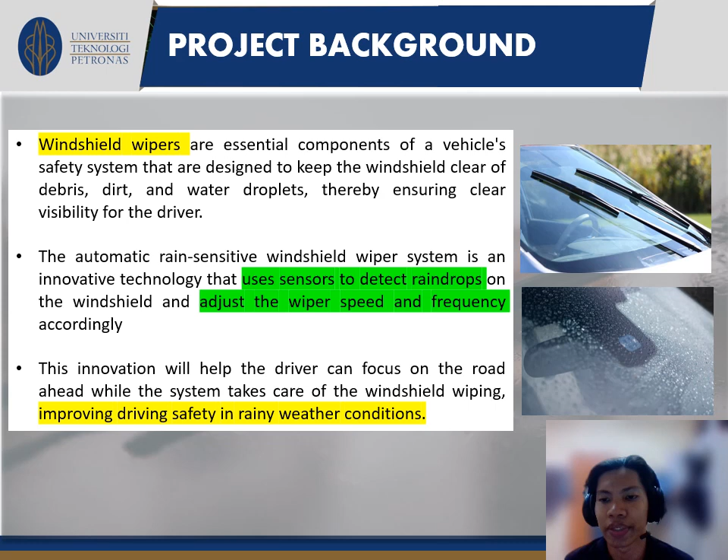Depending on the amount of the rain, the speed can be adjusted. So in this project, we are innovating the windshield wipers by using sensor to detect raindrops on the windshield, and it will automatically adjust the wiper speed and also the frequency. This automatic rain sensitive windshield wiper system then will help the driver to focus ahead on their driving, while the system will take care of the windshield wiping. Therefore, it can improve the driving safety in rainy weather condition.

Moving on to the problem statement for this project, as we may know, traditional windshield wipers are manually operated, where we can change its speed or frequency at the back of our steering. This method requires drivers' constant attention to adjust them. This then will distract the driver's attention away from the road, which is very dangerous, which then can lead to the increase in the risk of accidents.

A statistic by WHO or World Health Organization mentioned that more than 2 million people die in accidents each year during rainy season. These numbers are very concerning, so drivers nowadays really need to be aware of the safety of their car, especially in wet road conditions.

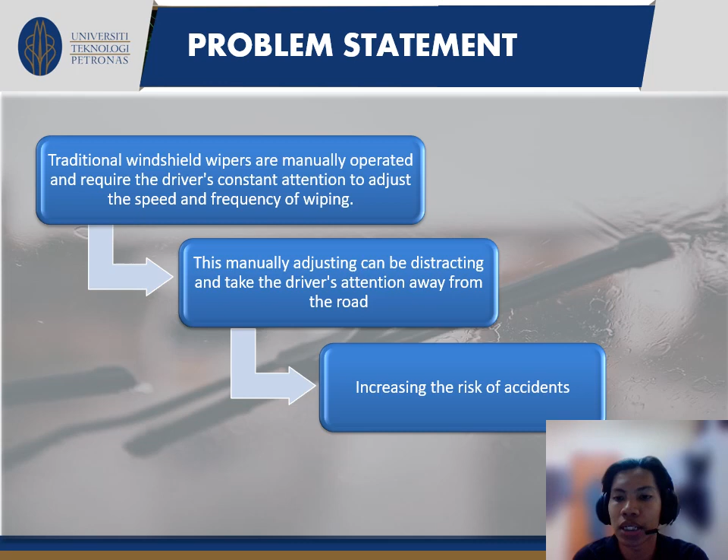To address the issue just now, we had come up with two main objectives for this project. Firstly, to develop a reliable and responsive automatic rain-sensitive windshield wiper system. So the system will significantly improve the driving safety, making it easier and more comfortable to drive in rainy weather conditions. Next, our objective is to design a user-friendly intelligent wiper control system for optimal performance.

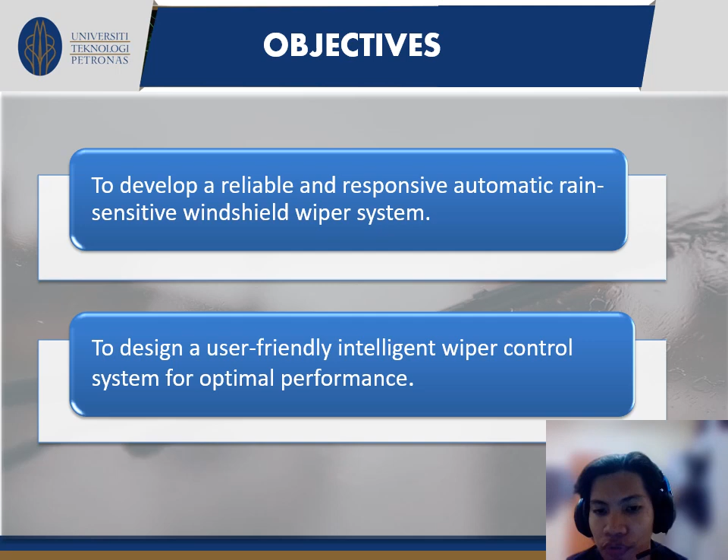We will implement the use of rain sensor and Arduino in this project, which we think will be giving an impact to the performance or efficiency of the windshield wiper system of a vehicle. We will be discussing the literature review. Firstly, let's talk about the working principle of the project.

The rain sensor is a key component of the system that detects precipitation on the windshield. When the sensor detects rain, it will send signal to the microcontroller, which then processes the data and sends a command to the servo motor. The servo motor then adjusts the speed of the windshield wiper based on the intensity of the rain. This process ensures the wiper operates at optimal speed for better visibility for the driver.

Next, moving on to the Arduino. Arduino is a microcontroller platform that provides a flexible and customizable solution for controlling the windshield wiper system. It processes the data from the rain sensor and sends the command to the servo motor, ensuring that the wiper speed is adjusted accurately. The Arduino can program the wiper to adjust its speed based on the speed of the vehicle.

Next, let's talk about rain sensor. Rain sensor is a vital component to detect the presence of precipitation on the windshield. It uses a sensing element to detect raindrops.

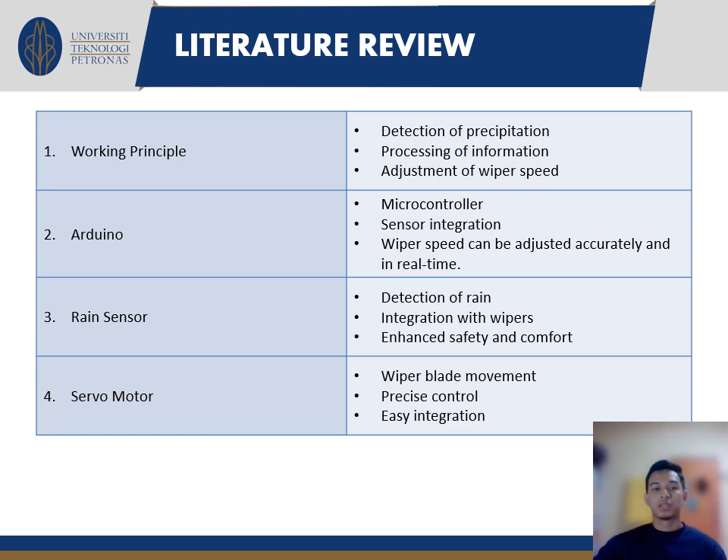Then, when it's detected, the sensor sends a signal to the microcontroller, which processes the data and sends a command to the servo motor. Finally, the servo motor is used as a control of the movement of the wiper to ensure they operate at optimal speed for the current weather condition. They provide a precise and reliable solution for adjusting the wiper speed to ensure better visibility and safety for the driver.

So moving on to the methodology section. So this is the project flowchart. This project aims to develop an automatic control system for the wiper, where the driver won't have to turn on the switch manually. A control system had been developed which contains rain sensor, servo motor, and Arduino microcontroller. So in this flowchart, sensors are used as the decision variable for the program.

When rain sensors sense the water, the voltage will change. And when water intensity increases, the motor speed needs to be increased also. So when voltage increases, the motor speed automatically increases by sensing the water immersion level. So the LED becomes on when the sensors work perfectly.

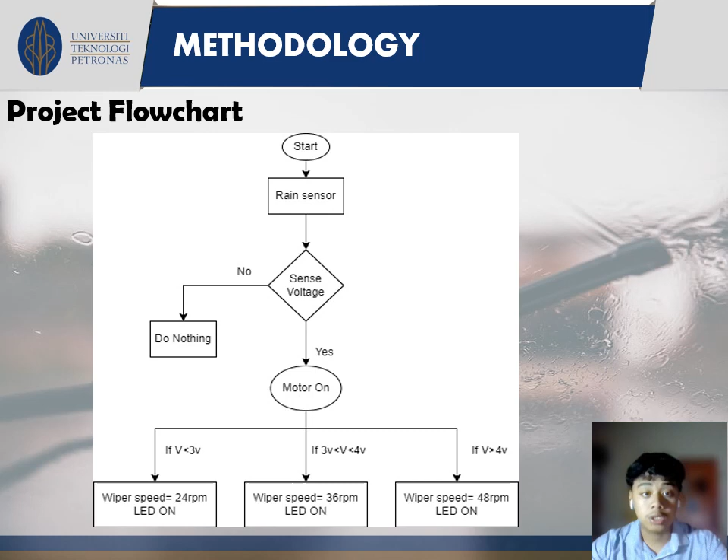The physical decomposition of this project will consist of 4 subsystems, which are the sensor, the motor and actuator, the wiper blade, and also the wiper arm. So this would be the morphology chart for this project. So basically the function of every subsystem can be explained. The sensor system works by detecting the rain on the windscreen and sending a signal to the control module informing LEDs of its presence and intensity.

The motor and actuator are used for physically moving the wiper across the windscreen. The wiper blade is in contact with the windscreen and removes the water and debris, and the wiper arm is used to secure and stabilize the connection between the wiper motor and also the wiper blade. And each of these subsystems was given 3 choices to be opted into the design.

For the sensor system, the choices would be the rain sensor, the optical sensor, and the infrared sensor. As for the motor and actuator, the choices would be the DC motor, the stepper motor, and also the servo motor. As for the wiper blade, this would be the material for the wiper blade, which consists of the rubber, natural rubber, and also the silicone rubber. And lastly, for the wiper arm material, which is the steel, plastic, and aluminum.

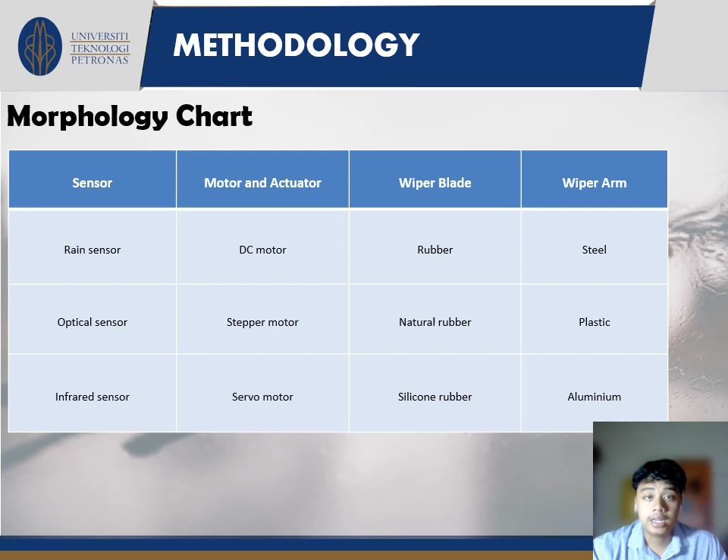So in choosing the best option to be used for the subsystem, an objective tree had been made. So every subsystem is based on 4 criteria, which are related to its function. So all 4 subsystems were given an equal weightage, which is 0.25, as they share the same importance in ensuring the success of the project. So the criteria for sensor are accuracy and response time with 0.3 weightage. So a high accuracy sensor with quick response time is important to make sure that the driver is safe while operating the wiper.

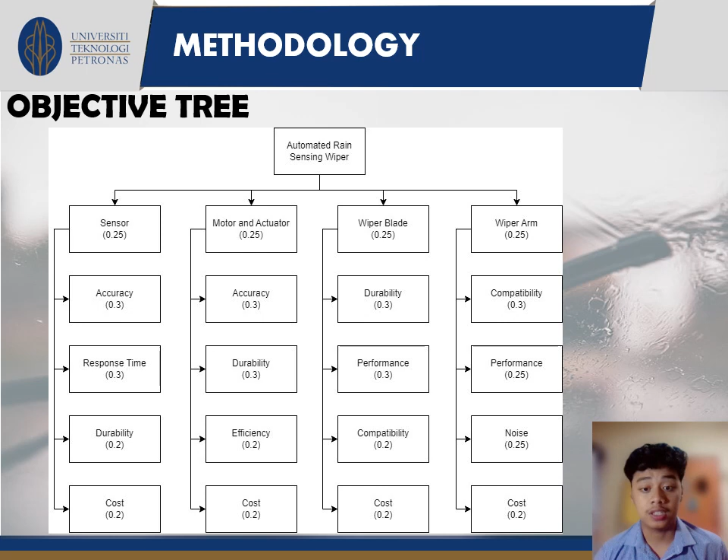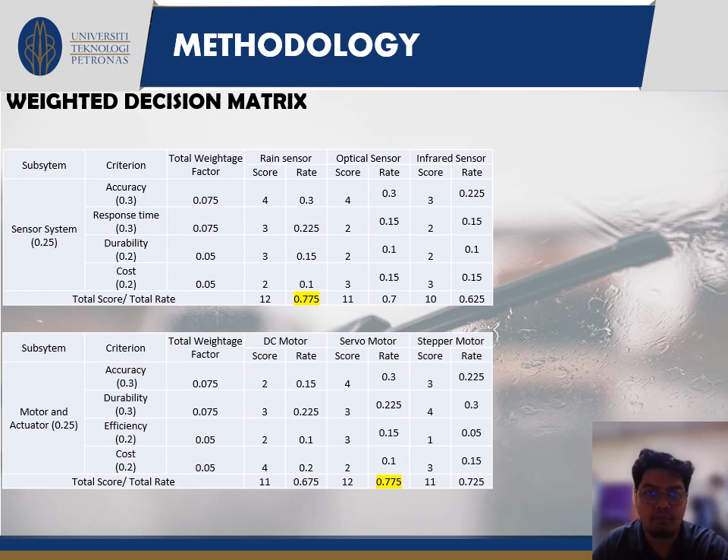Similarly, in choosing the wiper blade, we have natural rubber and silicone rubber. The criteria for the wiper blade are durability, performance, compatibility, and cost. From the decision matrix table, you can see that the silicone rubber has the highest weightage, 0.95, compared to the other wiper blade. Hence, we choose silicone rubber as the wiper blade system.

Then for the wiper arm, we have the decision among steel, plastic, and aluminum, and the criteria are compatibility, performance, noise, and cost. From the decision matrix table, we can see that the plastic wiper arm has the highest weightage, that is 0.875.

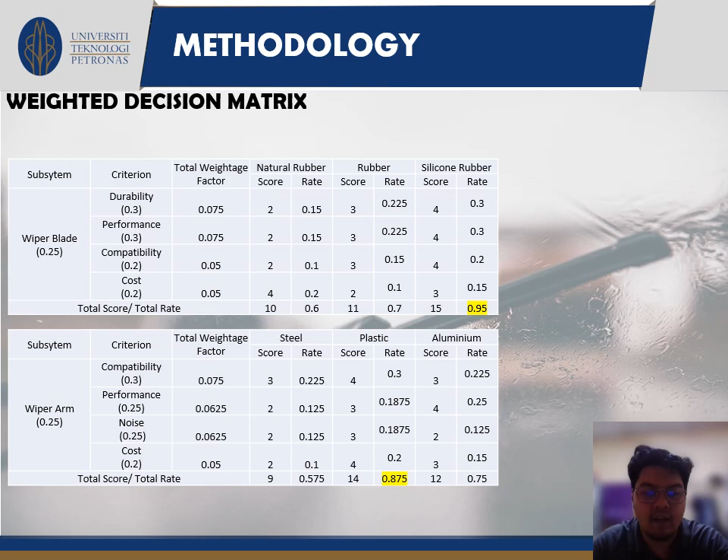Hence, from the weighted decision matrix, we can conclude that for all the 4 subsystems, we're using the rain sensor for the sensor system, the servo motor for the motor and actuator system, silicone rubber for the wiper blade material, and plastic for the wiper arm material.

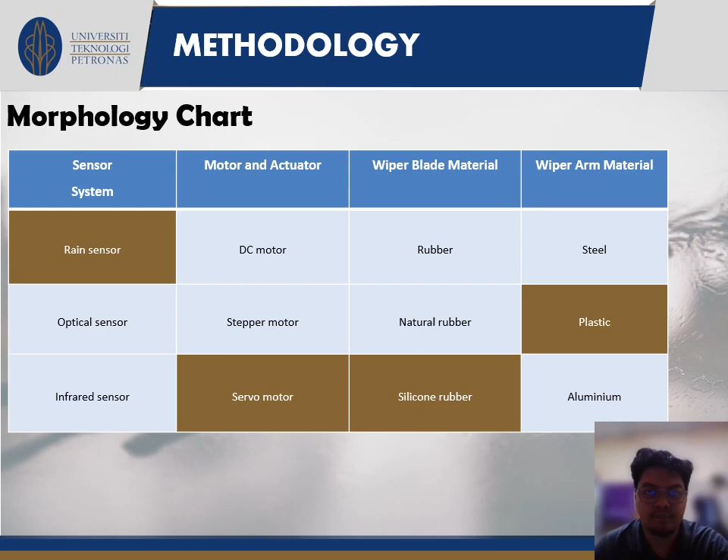Okay, so now moving on to the result and discussion part. The first one is the circuit diagram. From the circuit diagram, you can see how we're able to orchestrate the 5 components to satisfy the objective of our project. From the table, the first component is the Arduino Uno R3, which acts as the microcontroller. The 2 slide switches are to switch off and switch on the ignition or wiper.

The third one is the rain sensor, represented by the potentiometer, which is to detect the rain. The fourth one is the DC motor, which acts as the wiper motor to rotate the wiper. And the last one is the oscilloscope to show the frequency of rotation of the wiper. So in the project, we're able to accommodate one sensor, the potentiometer, which acts as the rain sensor, and one actuator, the DC motor for the wiper motor.

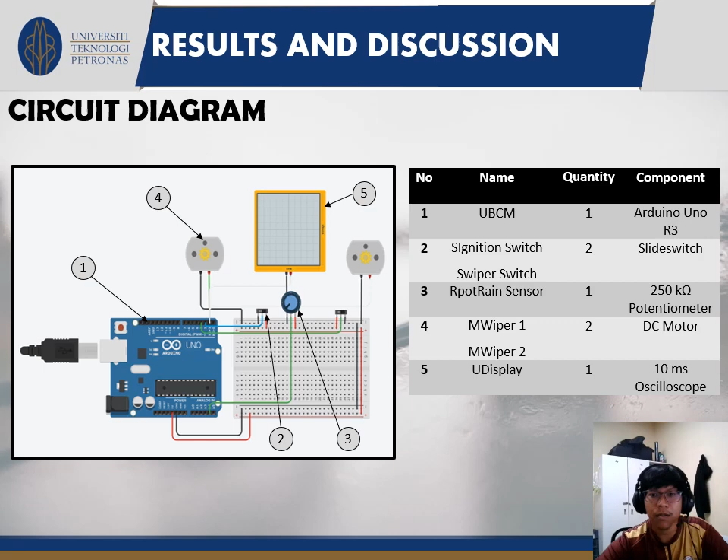Okay, so however, when the rain is detected, both the ignition and wiper switch are activated. The 2 wiper motors start to activate. And when the speed of rain is increasing, as simulated by increasing the potentiometer, the speed of the wiper motor also increases.

So now comes the last part of the result and discussion, which is further improvement and recommendation. The first one is to optimize the pulse width modulated signal, PWM signal. This can be achieved by using a PID controller, where the duty cycle could be adjusted continuously based on the potentiometer value, resulting in smoother and more efficient motor control.

The second one is to use external hardware such as relays or transistors to switch the motor on and off, hence reducing the load on the microcontroller and providing reliable motor control. And the last one is to add a display to show the current potentiometer value and wiper motor speed to ease the process of checking current settings, and we can adjust if needed.

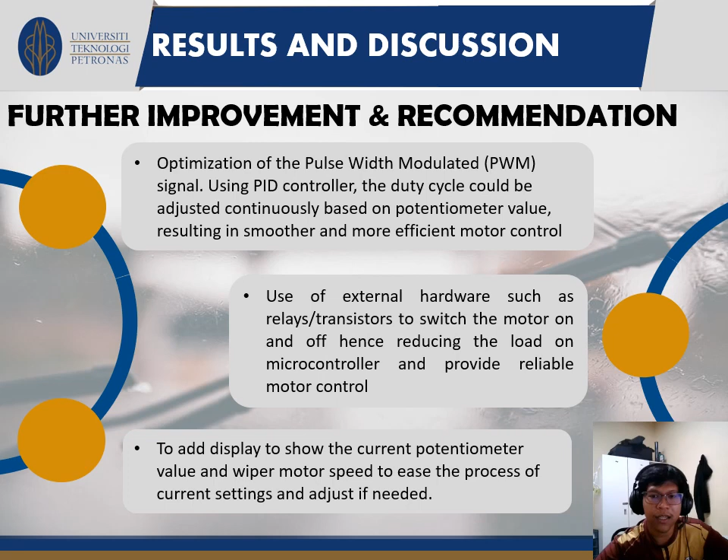So in conclusion, the automatic rain sensitive windshield wiper is an innovative solution for adjusting the speed of the windshield wiper based on changing weather conditions. The project used a rain sensor to detect the precipitation on the windshield, the Arduino as a microcontroller to process the data, and a servo motor to control the movement of the wiper.

The project provides enhanced safety and comfort for the driver by eliminating the need for manual adjustment of the wiper. Overall, the automatic rain-sensitive windshield wiper provides a more reliable and efficient solution for adjusting the speed of the windshield wiper, ensuring better visibility for the driver.